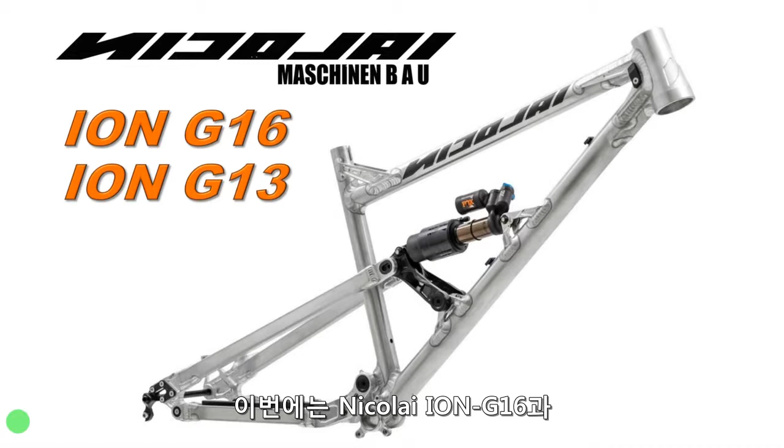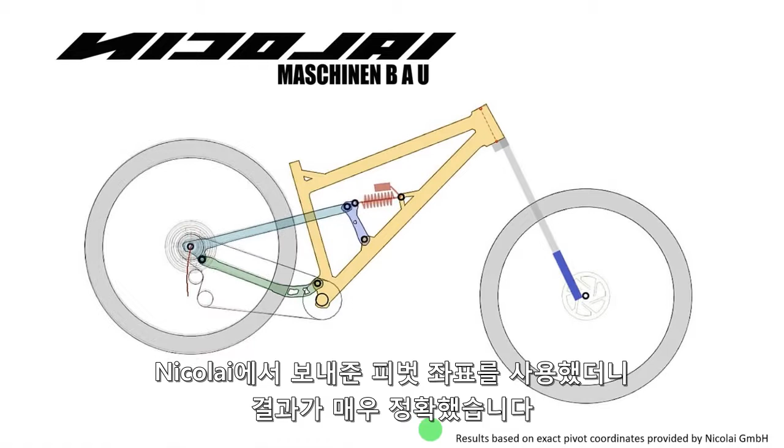Hello guys, welcome to another video. This time I have here the Nicolai ION G16 and the ION G13. This is the illustrative model that I used, okay? Nicolai sent me the coordinates for the pivots, so the results are very accurate.

First of all, we have to determine the instant center, okay, the magic point, also known as the virtual pivot. As you know, on Horst-link bikes, you need to see the pivots, and then you make the crossing lines, and the intersection point is the instant center.

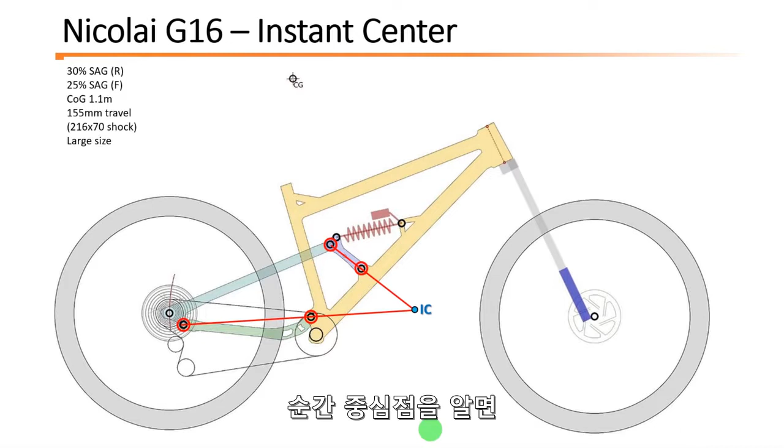Now that you have this magic point, you can easily determine the anti-rise, okay, the braking behavior. To do that, you just cross a line between the rear contact point and the instant center, okay? So this bike has an anti-rise of around 60%, which is a normal value for a Horst-link bike. This value means that the amount of rotation of the brake caliper around the disc is not much, okay?

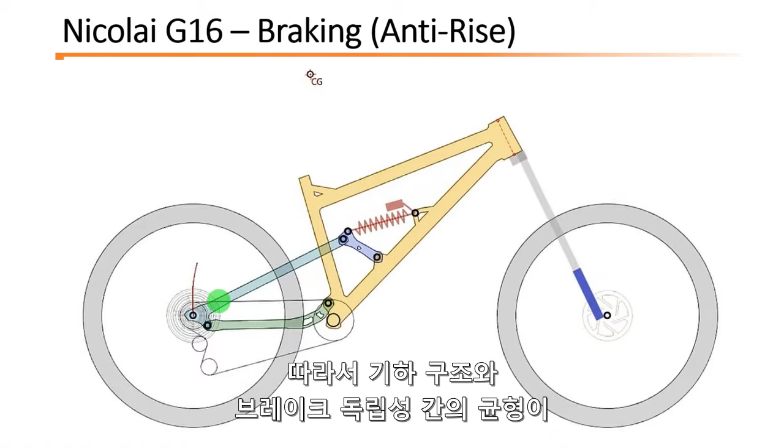So you got here a very good balance between geometry and brake independency. This graph just represents how the anti-rise changes across the travel, and as you can see, the ION G16 and G13 are very similar, okay? They use a similar layout for the suspension, so the results are very similar.

Good, so moving on to a more important parameter, the anti-squat, okay, the parameter which determines the pedaling efficiency of the bike. To determine this value, you already have the instant center, so now you cross the line between the axle and the instant center, which is the swing arm line, okay, and we will see where this line crosses the chain line.

So as you can see, it crosses at that point here, and it crosses at that point for every cog, okay. Independently of the cog that you are using, the chain line will always cross the swing arm line at that position there, okay? So this means that the anti-squat of this bike will be very close to 100% at the sag position, okay? Independently of the rear cog, okay?

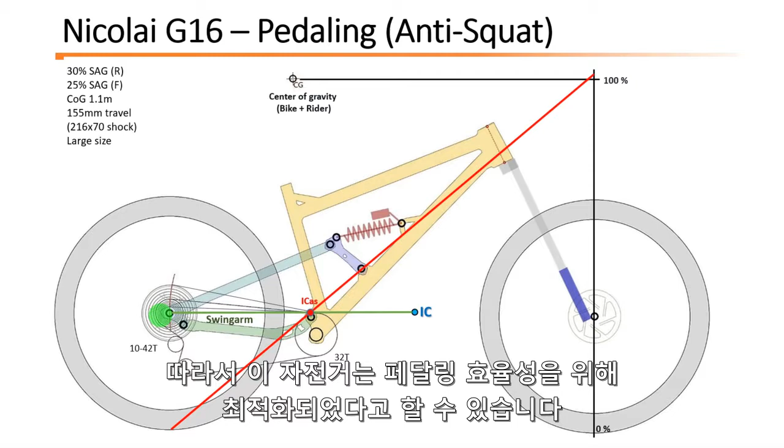So the bike is very well optimized for pedaling efficiency. And as you can see in this graph, which represents the anti-squat values across the travel, at the sag position, on the pedaling zone, the anti-squats are around 100%, okay, very good anti-squats independently of the cogs of the cassette. This graph is for the G16, but the G13 is very similar, okay, 100% anti-squats around that for every rear cog.

Good, so both G13 and G16 are very good pedalers. As you might know, to have anti-squat, you need to have chain grow, okay?

Unless you have a high pivot bike, on high pivot bikes you can have good anti-squat without having chain grow, but on traditional bikes with low pivots, you need to have this chain grow in order to have the chain pulling, okay? So basically the chain is pulling down the suspension, eliminating the squat, okay, the bob caused by the horizontal acceleration of the rider.

Okay, so the chain grow is basically the result of this distance, the bottom bracket axle distance, and as you can see, this distance increases during the travel, okay, and in this case the G16 has 22 millimeters of chain grow, which is a good value for a bike that pedals so well.

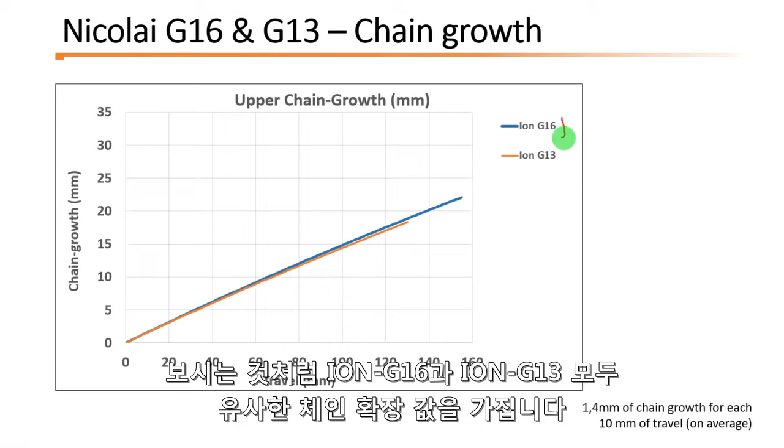And as you can see, both ION G16 and G13 have a very similar chain grow profile. Just a small note, the more chain grow you have, the more pedal kickback you have, okay? Because since the chain is growing, it's pulling back the pedals, okay? The pedals are rotating back because the chain is pulling back the pedals, okay? So chain grow is proportional to the pedal kickback.

To compare this with other bikes, I've drawn this graph which represents the chain growth of several bikes, and the ION G16 is this one, the green line. As you can see, we can separate these bikes into three groups: the bikes that have a very high chain growth, the bikes that have a normal optimized chain growth, and the bikes that have low chain growth.

The bikes that have high chain growth just have high chain growth because they have huge anti-squats, too much anti-squat, or because they are not well optimized. The ones that have low chain growth, this is just because they have low anti-squats, so the pedaling efficiency is also low.

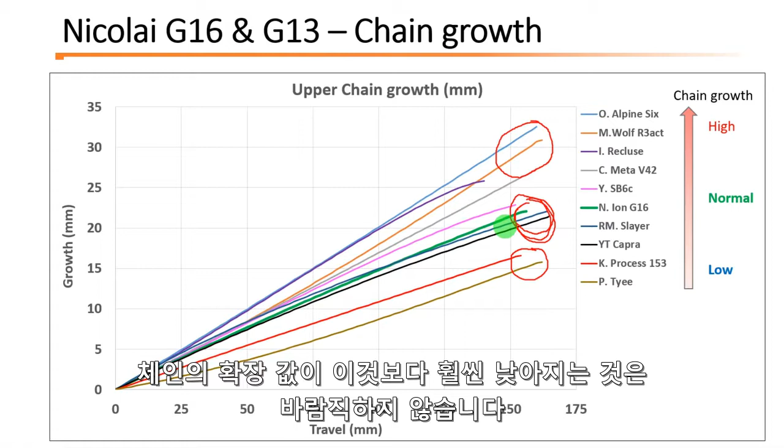This group here, where the ION G16 is included, they have normal values of chain growth—the minimal values needed to have such good pedaling efficiency. So you can't drop these values much more than this, unless you are using a high pivot bike, as I said previously.

Good, so moving on to leverage ratio. Leverage ratio is basically the ratio between the travel at the wheel and the travel at the shock, and the way this ratio changes across the travel will determine the progressivity of the suspension. In this case, the Nicolai have a very progressive suspension, as we are going to see right now.

I'm simulating the ION G16 as a 150 millimeter bike, but you can increase the travel on this bike to 170, and if you do so, you will get more progressivity.

By comparing the progressivity of several bikes, you can see that the Nicolais are quite progressive, and they appear at the end of the table. The G13 has 44% progressivity, and it's probably the most progressive 130 millimeter bike on the market.

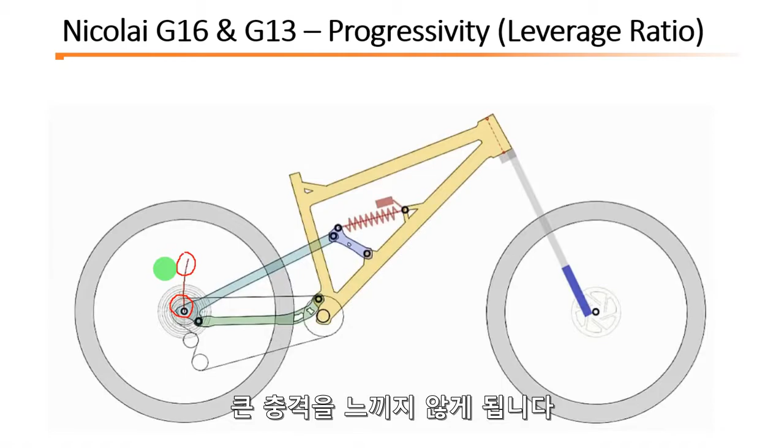So a progressive bike just means that you have a high leverage at the initial travel, so very smooth or very sensitive suspension, while at the same time you have a lower leverage at the end of the travel, so you get the bottomless feeling. On big jumps and bigger impacts, the suspension will be very smooth at the end of the travel—you don't feel those harsh impacts at the end of the travel.

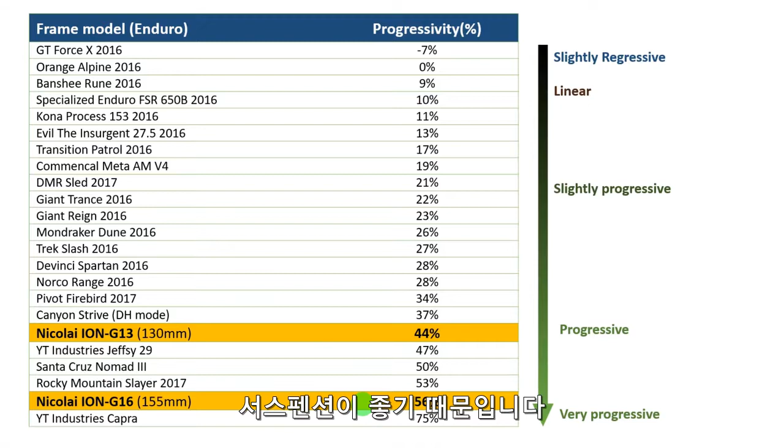To conclude, both ION G13 and G16 have very good pedaling efficiency with anti-squats around 100%, and the chain growth and pedal kickback are well optimized for such good pedaling efficiency—they are under normal levels. The braking is okay; there is a good balance between traction and geometry, with anti-rise around 60%, a normal value for a horst-link bike.

Finally, the progressivity is quite substantial. These suspensions are truly progressive without being too much, and as a consequence you get a smooth initial travel and good bottom-out resistance at the same time. Overall, I would say that Nicolai knows what they are doing, and they just made two great bikes with very well optimized kinematics.